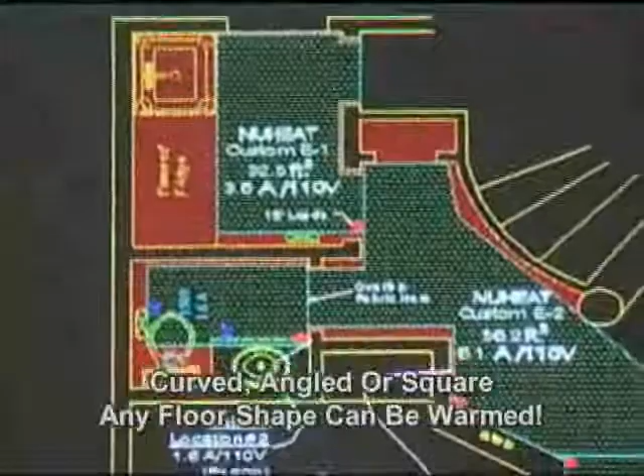Nuheat provides standard and made-to-fit mats that make warming your floor both easy and efficient. Curved, angled, or square, it's all the same—any floor can be warmed to the same luxurious comfort level. By following a few simple steps, together we can decide the right combination of mats your project requires.

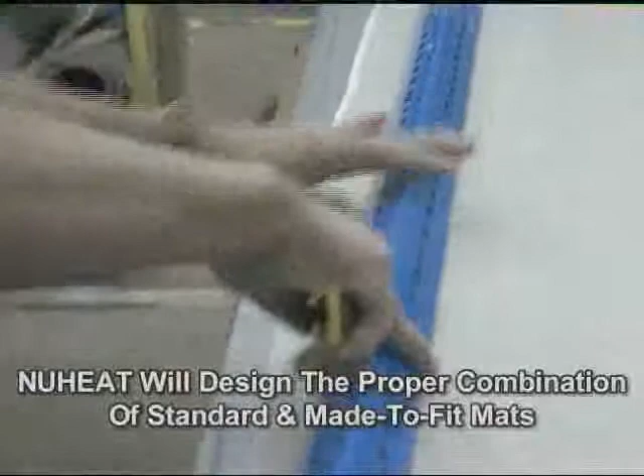Simply sketch and measure the room or rooms accurately, fax in the drawing, and let Nuheat do the work for you. Nuheat will design the optimal mat configuration to provide the most comfort and cost-effective coverage for your customer. And remember, a tile will only be warm if it has Nuheat directly beneath it. Nuheat does not warm adjacent tiles.

Step 1. Use the graph paper supplied by your authorized distributor to draw a large, clear sketch of the room. Remember to use the entire piece of paper.

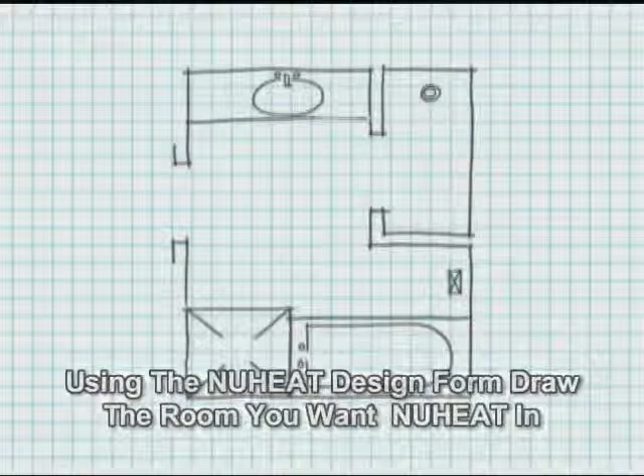Step 2. Measure the perimeter at floor level. Start at one corner of the room and work your way around. Do not adjust the measurements based on your understanding of where the mats will be placed. Show all partial room measurements as well as the overalls, the total width and the length of your room.

Step 3. Check the accuracy of your measurements by comparing the sum of your partial room measurements to the overall room dimensions.

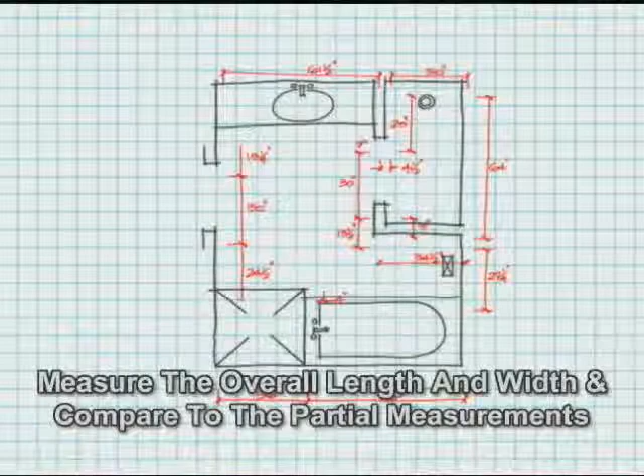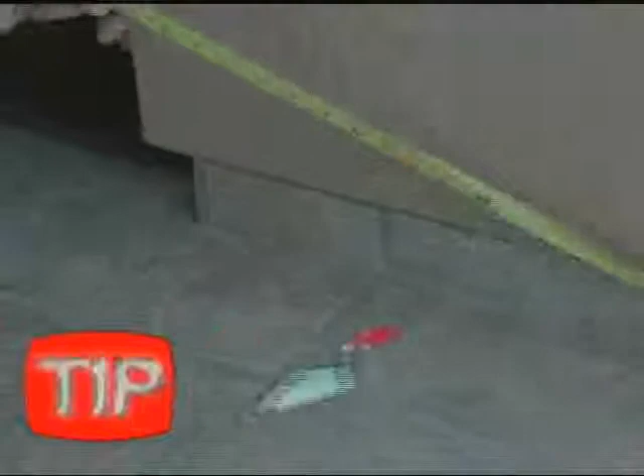Step 4. Note specifics: power locations, fixtures, toilet flanges, door locations, cabinet kicks, heat vents, islands, and all other floor obstructions must be accurately located on the drawing. For custom cabinet applications, we will require the dimensions from the back wall to the toe kick of all cabinets.

Measuring angles and curves is easy. Remember to follow steps 1 through 4. These measurements are necessary before beginning to measure the angles and curves.

For angled fixtures or walls, simply pick a point directly across from the angle and measure that distance. This is what we call an angle lock. Note that distance on your drawing.

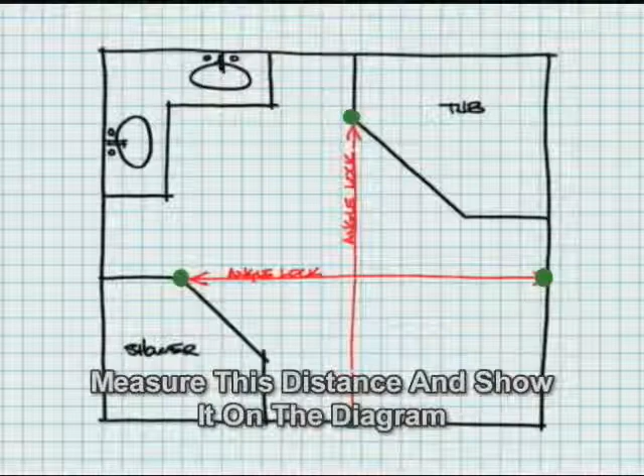It is these measurements, combined with the perimeter measurements, that will allow the design team to calculate the angle of the fixture or wall. To measure a curved wall or fixture like the one shown here with the curve in the corner, a few additional measurements must be taken.

First, mark the center point of the curve on the floor. Then measure to the center point from two corners of the room and indicate the length to the end point of each of these curve locks on your drawing.

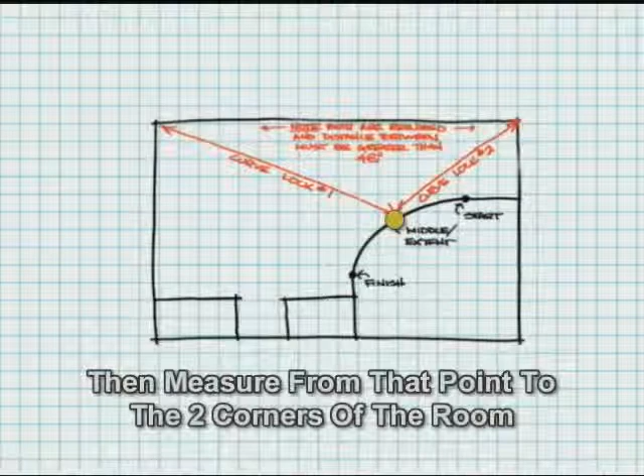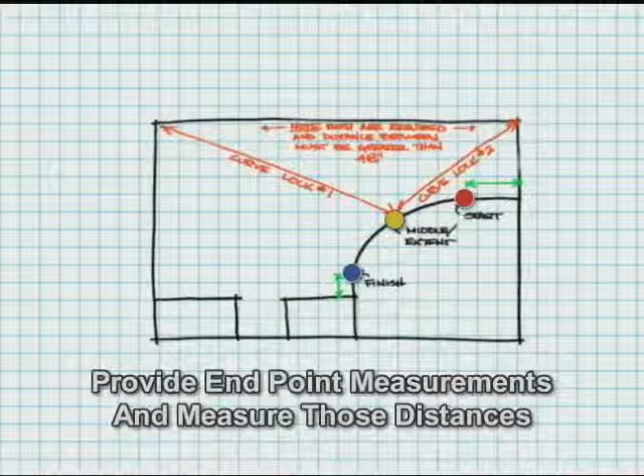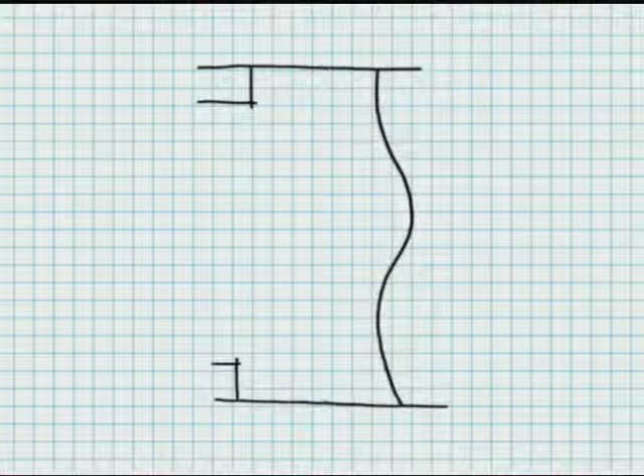To accurately measure the curves on a wall or fixture such as this, simply locate and draw a 90-degree reference line from the beginning of the curve to the end of the curve. This should be marked both on the actual floor and on your drawing.

Next, measure and mark out 12-inch increments along your reference line starting at the top. Then measure the distance between the reference line and the curve at each 12-inch increment.